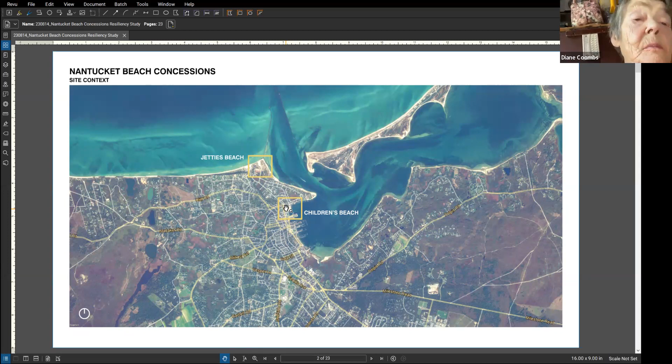Just some quick background, and then we'll go through Children's and Jetties in that order. We've gone through several back and forths in terms of design with the client group, and we've gotten to a point where we're looking for feedback from both of these bodies. So I appreciate your time today. We've also conducted an online survey of the public to understand the public use of Jetties, Children's, and Surfside, and also people's appetite for change on various sites. And so we've also taken that into account. And then we've also looked at the coastal resilience plan, obviously, and how that fits in with these sites.

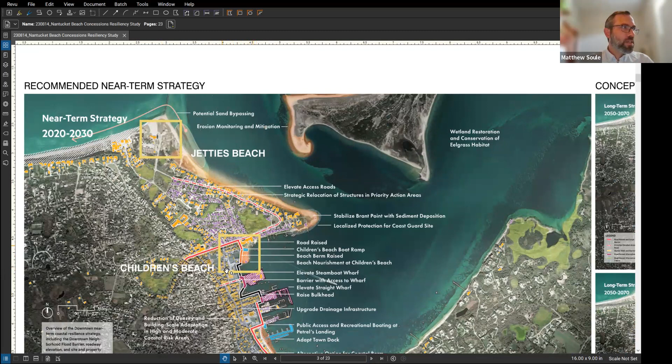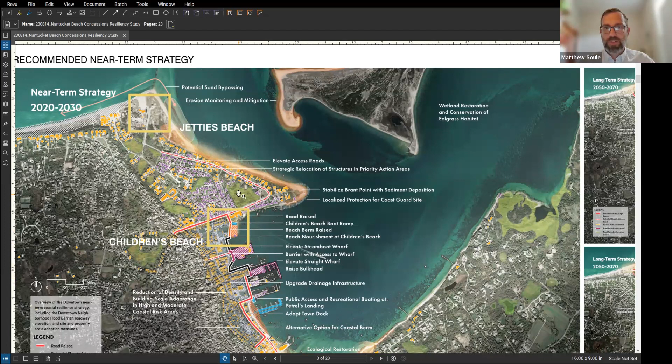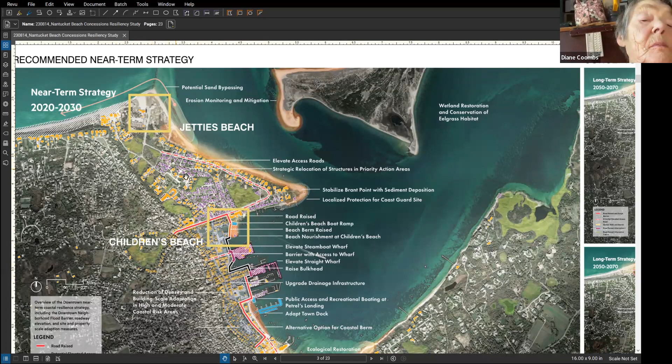So starting with Children's Beach. And also, if something isn't clear, please jump in and ask for clarification at any time. So overall, for the coastal resilience plan context, I'm going to zoom into this corner here. Children's Beach fits within the downtown strategy, and we'll look at that in greater detail with a zoomed in plan. So this isn't the last time you'll see this drawing. And then Jetties sits outside the near-term strategies. And again, we'll look at that in context of the near term and then the conceptual long-term strategies, knowing that these were not actual recommendations of the plan, but were purely concepts that were floated as ideas.

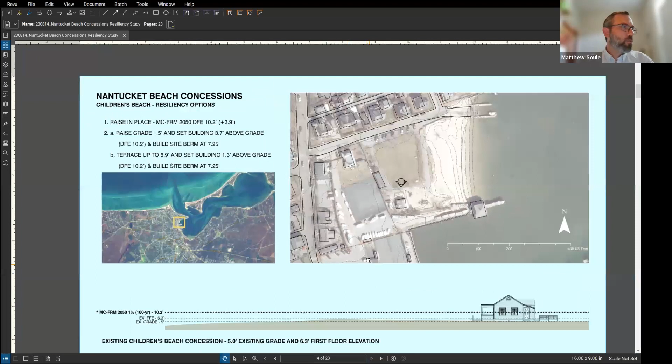So starting with Children's Beach, we looked at 3 options. We looked at just raising the building in place without any site manipulation. We looked at raising grade 1.5 feet and setting the building 3.7 feet above grade. Currently, the building sits 1.3 feet above grade. So that's its current relationship to grade. So obviously 3.7 would be a big departure from that, and we'll look at the elevations and what that means in terms of access and the building facades.

And then we looked at terracing the site up to 8.9, and then allowing the building to maintain its current relationship to grade. And then both 2A and 2B we pushed further than option 1. Early on, it was determined that option 1 was the least desirable of the options. And so we'll look at the site and what we mean by site berm and how that fits into the coastal resilience plan.

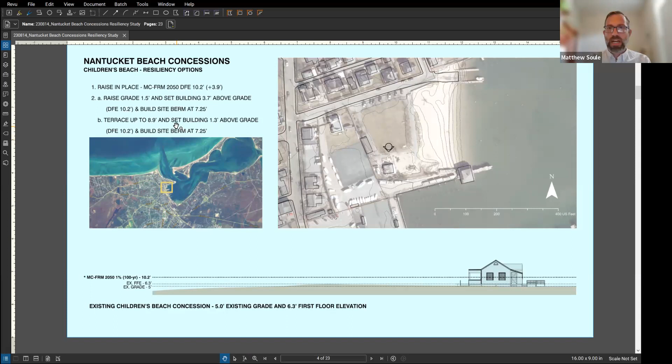And a quick word about our design flood elevations and how we arrived at our numbers. So we are using the MCFRM 2050 1% or 100-year storm with a still water elevation. We have in here what the 2050 100-year storm would be with wave action, which raises it almost 4 feet. And so we landed on the 2050 still water elevation as an achievable goal that did not raise the FFE beyond what is practicable, honestly. And we did go back and forth on this internally with the design, with the client group. So 10.2 is our design flood elevation for this site.

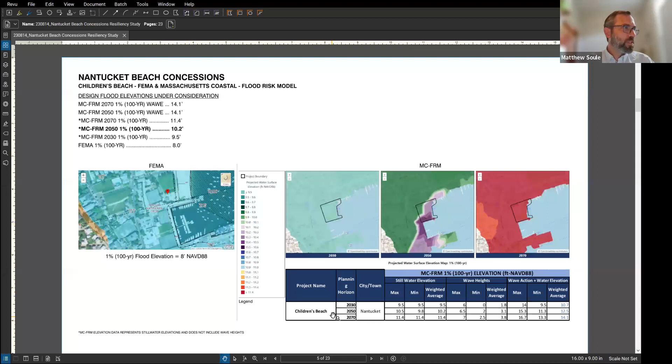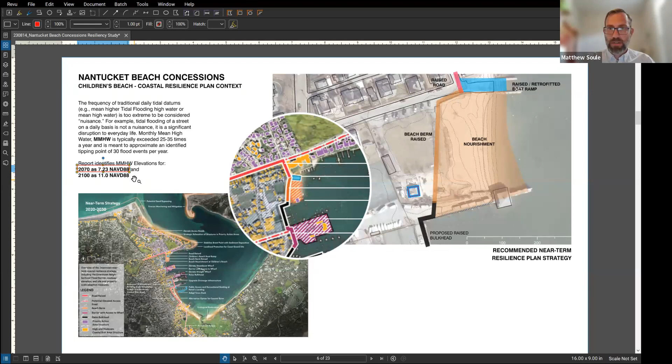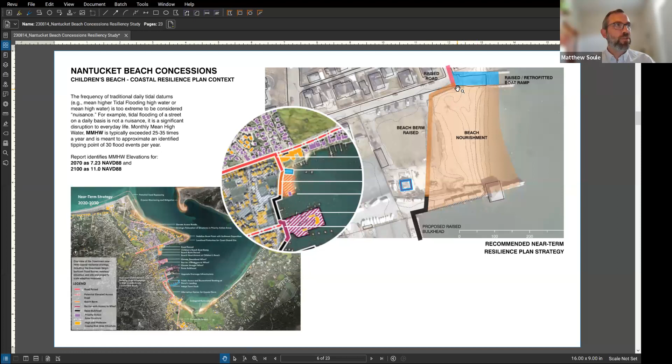We've rounded that up to 7.25. Just, higher is always better. So, oh, excuse me. So in the two options, 2A and 2B, we're aiming for a 7.25 elevation across the site that would be in agreement with the coastal resilience plan. And then we'll also talk about the interface between the raised road and the site and how that could be accomplished.

So this is the building as it exists today with the accessibility ramps. James, do you want to say anything about the building? So the current state of it, it's a vernacular architecture, a colonial style. It has two accessible ramps, as Matt had suggested. Bringing up Holly's point, Vince and Charlie's point, this building is managed by a yearly or bi-yearly contract with a concession system.

And it has elements that if we were to relocate it or lift it up, we'd have to take everything into play. The two existing public restrooms in the rear of the building are not accessible per se. One is locked up, the other one is for storage. So one of the solutions of raising the structure is to come up with external restrooms for future use for the building and for the site.

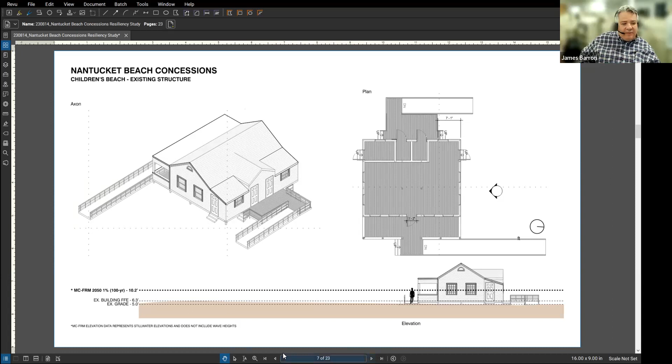Go ahead, Matt, if you want to bring up the next slide. Mhm. Yeah. So go ahead, Matt. Oh, no, I think, James, if you want to tackle this one, because really it's just raising the building without any sort of site improvements.

Exactly. So to raise the building up, we're building a structure, raising the structure up and building a Chinese wall around it to make the building more accessible. Well, it takes away from the curb appeal of the building and the site, because now you have continuous ramps and a platform in the rear of the building for accessible use. Secondly, it isn't inviting to others, because you just have stairs and ramp. The visual impact is taken away because of all this ramp and extension, but for the ramp and extension to exist, the building has to be raised up.

So this option was talked about, but it's not something that we as Weston and Sampson and its parties agree is the best solution. And like I mentioned earlier, we talked about having an external restroom facility in the rear of the building where right now the exterior freezers or coolers are located. It solves the accessibility, but it doesn't solve the vernacular design. At the same time, it's encroaching on individuals using it. So basically, Matt and I went back to the drawing board and came up with another option.

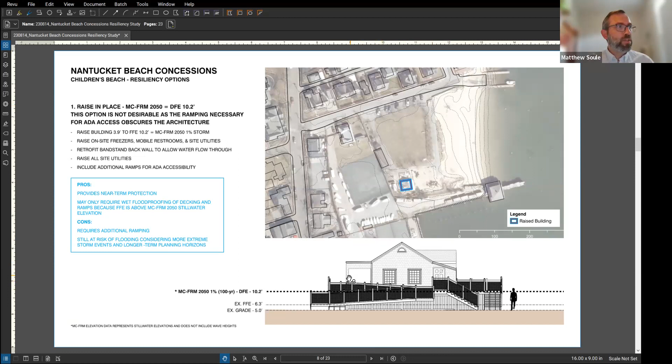And this is, again, just as we were saying, the amount of stairs and ramps needed in this version was really deemed not, that we found there were other options that were better and sort of fit the historical character better. Is that fair to say, James?

Yes, yeah. I mean, the ramp itself is basically based on the Resilient Nantucket Flooding Adaptation and Building Elevation Design Guidelines. But if you really take it one step further, as being an architect, you can come up with a more pleasing to the eye and still have the character of the building exist on the site instead of bearing up with accessible ramps. So it really solved one problem, but caused three other problems to exist.

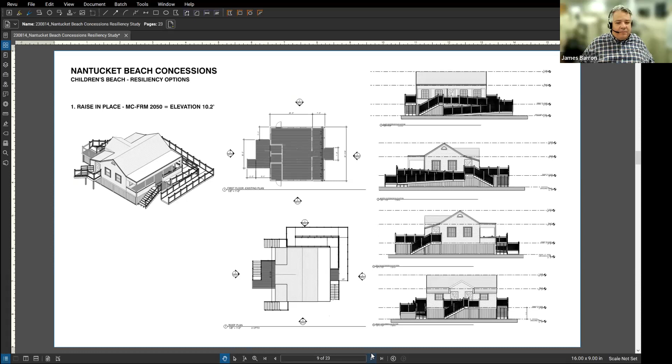So the next version we looked at was raising grade 1.5 feet, and then setting the building at 10.2 for a finished floor elevation. So the building is still 3.7 feet above grade, which is obviously higher than it is now, which changes the character somewhat. And James, I'm going to jump to the plan first, and then we'll go to the plans and elevations of the building.

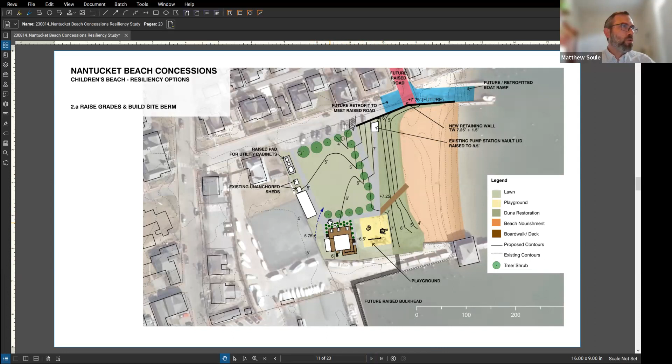So by raising grade at the building, it allows us to slowly ramp up to a berm that would be set at the sort of goal of the coastal resilience plan. That would be 7.25 across the site. As part of this, you would propose to raise the playground. The berm would run in front of the playground. This green area in front of that could potentially all be dune restoration, again, to help mitigate storm surge. And then there would be boardwalk access through the dune restoration to access the beach.

And the existing pump station vault would be raised to be a foot clear of the berm. And then at the building, the ramp access would be along the side to keep the front clear of the ramp. We can zoom into that on the next slide, but essentially the seating area that's currently on grade would be lifted up and put up on a porch. So the seating area for patrons would still exist with shrub plantings around the building.

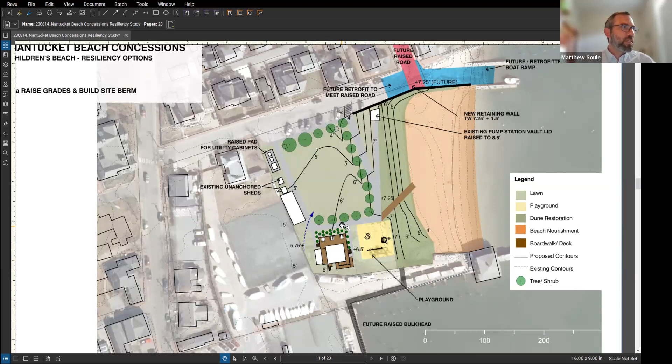And then at the end of the berm, we would propose a wall. The reason for the new wall would be in the future, as part of the coastal resilience plan, this road is proposed to be raised to 7.23 or 7.25. And so this wall would be built to 8.75, which is 18 inches above the future road. So that allows the road to be raised in the future, and also for the boat ramp to be retrofitted against this wall, which would allow the site to remain undisturbed through that work.

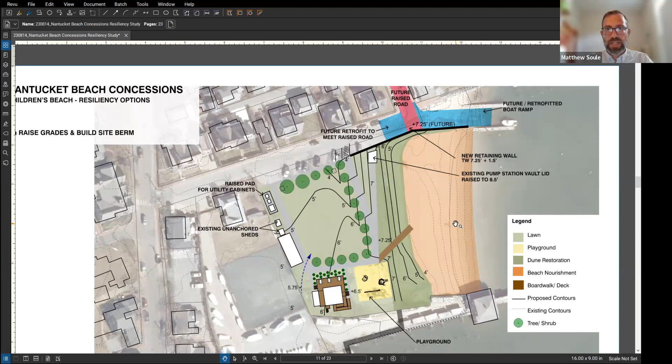So it's a pretty interesting site in terms of trying to figure out, this is where the rubber of the coastal resilience plan meets the road, and how this actually gets executed. And then in terms of the building and the building character, I'll let James speak to how we address that. So on the building itself, in this design, we basically took the accessible ramp and put it at the back of the building, closer to what is the boat storage area. The access to the front or the concession area has the main stairs and the ramp to the left, which wraps around to the new porch. The porch would be facing, as Matt had mentioned, the bandstand area.

Then we now have proposed exterior accessible restrooms, two unisex bathrooms and a mechanical room. That structure would be off to the backside, closer to the tennis courts. So by doing a design like this, individuals approach the building by ramp or by stairs, use the building as a true concession area, and then use the new proposed restrooms to the backside of the building.

Using, once again, the Nantucket Resilience Building Elevation Guidelines and Department of Interior standards, we would not change the character. The only character change would, of course, be lifting up the building and having the wraparound porch and concession area for eating, and at the same time using the character of the site to blend with the facade. Once again, it's not something I'd have on my deck for enjoyment, but we're solving the three problems that have arisen for this site. There's pluses and minuses. A plus is that the central entrance and all the entrances to the deck work with what is originally there.

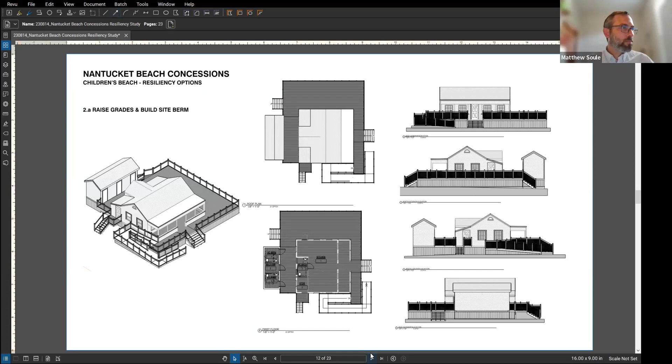And then the last option we looked at is terracing the site up to 8.9, which keeps the building at its present relationship to grade, which is 1.3 feet. We went through a real push and pull here; getting up to 10.2 is a significant elevation change. Obviously if you pull the building up too high without pulling up grade, it just ruins the building character. So we've been trying to find that sweet spot between raising grade and raising the building. I think we prefer this option, and we can talk through why.

So it has a ramp on the face that ramps you up slowly to the access point, and we would maintain the ramp that's there today. We can jump to the plan to see that a little better. And then also there would be plantings around the building to mitigate that grade change. We can look at the grading there. So we're still raising grade a little over a foot to 6.25 from its current elevation of 5 to lessen the amount of ramping you need to do.

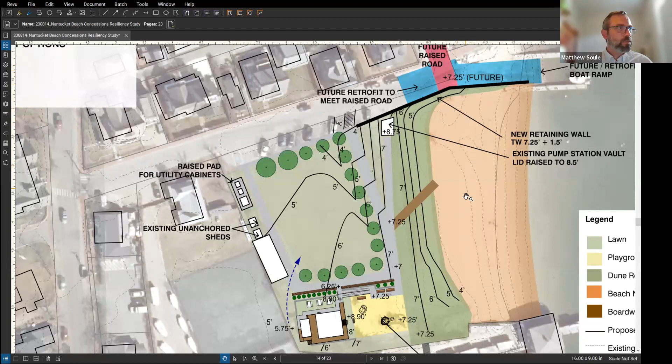Then there's a direct switchback that gets you up onto the picnic terrace at 8.9, and then you have the accessible ramp almost as it is today that gets you to the building FFE. And then it's the same site treatment in terms of the north edge of the site with the future raised road. And again, a dune restoration in front of this, along this new raised edge, and a boardwalk through to the beach.

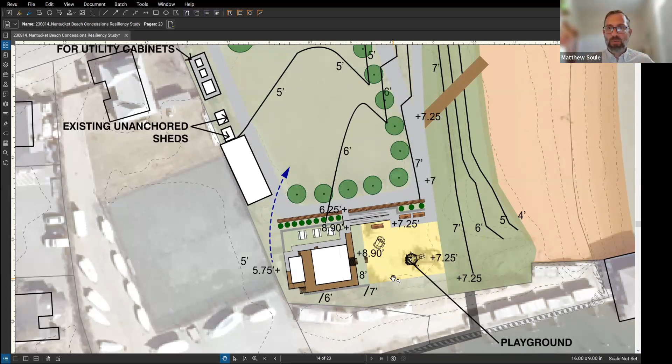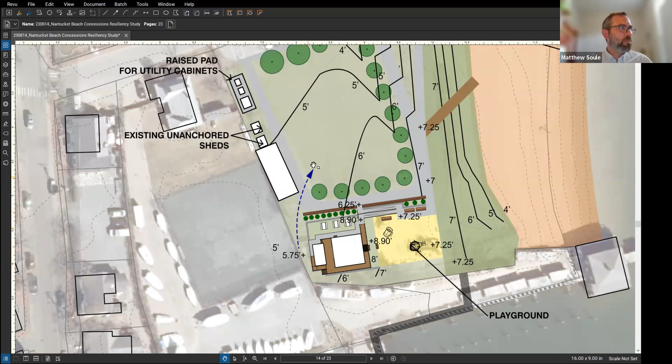And then we were careful with the walls. The walls are perpendicular to the coastline. There's no wall that's parallel to the coastline. Walls that are parallel to the coastline exacerbate wave reflection and scour. So if this is overtopped, the waves are really just going past the walls; we're not introducing a vertical surface. And then we're coming back down to existing grade in the back corner, just enough to still get water out from that back corner at elevation 5.75. And I'll let James speak to the...

In this version, we are not addressing the unanchored sheds that are on site. We would propose a raised pad for the utility cabinets that are on site.

Ray, I see you have your hand up. So I have a load of comments and questions. Is it appropriate to start into it at this point, or would you like to continue? If we could just wrap up this description of this version of the building, then we'll stop and discuss the versions as a whole for Children's before moving on to jetties. Does that sound good? Absolutely. Okay, thank you.

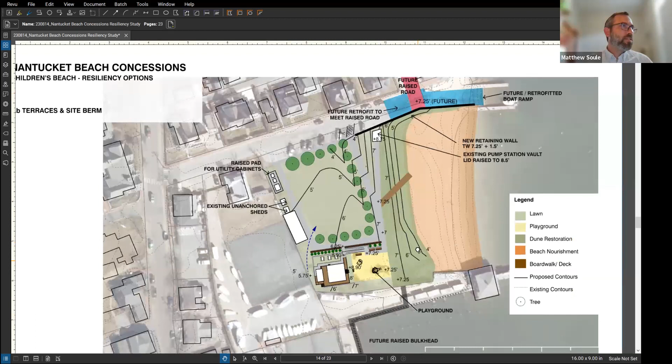And so the bandstand would be retrofitted to have breakaway back walls, but we're not proposing to raise the bandstand at this point. James, I'll let you speak to the building changes. Thank you. So the 2B terrace site berm: we're not really taking a lot of what is existing for the Children's Beach concession area. We're doing the bare minimum, but now it's a grade change instead of a platform and terrace change. It doesn't put a lot of impact on the building per se, and visually it doesn't take away from the site itself. Once again, on the rear of the building, we show accessible bathrooms that are open year round, and the vernacular plays off the building itself.

I think that's the important thing: keeping the consistency of the design for the addition and for the original building, and visually it works with the site too, developing it this way instead of having these additional ramps that bring the building up, so set in place, which really all three options talk about, set in place. I think we embraced the comments from the early level of the community. And I think Matt and I have come up with a pretty good solution, but we're open to suggestions, of course, so.

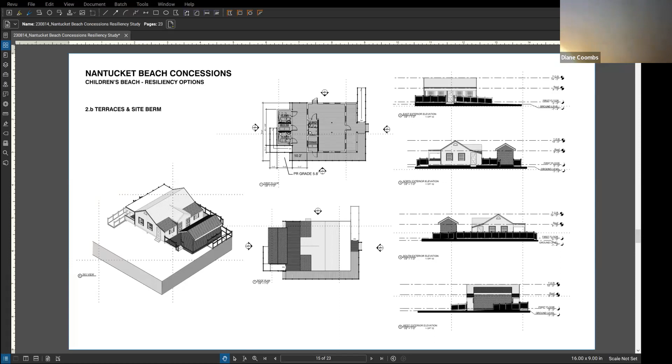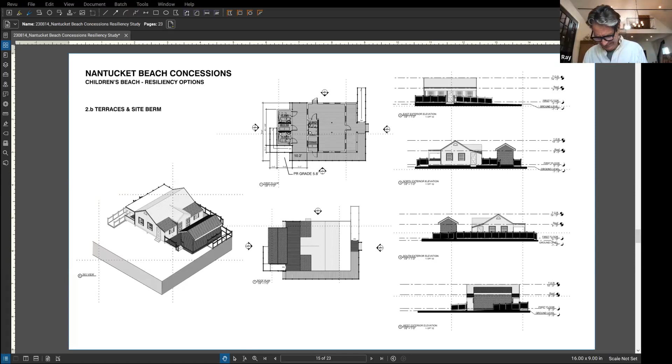Thanks, Mr. Chair. There you go. Sorry, I got a couple things going on. Yeah, so we see. Stephen, are you there? Oh boy, we may be having technical difficulties. Sorry, Mr. Chair, I'm back. There you are.

Yeah, so I guess I'll just be quick. Where I'm at with this is, I don't want to get into architectural comments. I believe this is going to require further notifications, so I don't want to get into any of that discussion, other than to say I agree with the chair's comments, I agree with Diane's comments. I am concerned about the ADA being around the back. I'd like to get an understanding of how this fits into the town's vision, the ConCom's vision, and the Coastal Resiliency group's vision with respect to how this particular approach, which is along the lines of hardening, not retreating but raising, fits into the bigger picture.

And under the common ground approach, no pun intended, sitting here with ConCom, I'd like to get some understanding of what they think about raising the grade, because my understanding was that was kind of a no-no, and we've always steered away from that. It'd be a very important tool, but I don't think it'd be wise to be doing it piecemeal, in this instance and in others around Brant Point and other areas. So I'd like to understand their thoughts, one, on the strategy, and two, on a comprehensive approach. Perhaps an area plan would be appropriate.

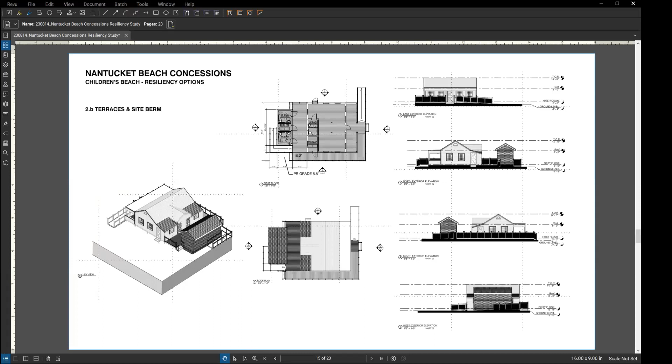Thank you, Mr. Chair. Thanks so much, Stephen. Okay, Joe, Carrie, Connie. I don't have a hand raising thing, or I can't find it. Well, you don't need it. I'm recognizing you. Thank you.

Along the lines of what you said, Ray, I would most want to preserve the building as visually impactful as it is today. I am not against raising the grade, but knowing that ConCom might be, I think we really need to pay attention to what they have to say. But if they would consider it in this case, I feel like we should split the difference, maybe ramp some grade and ramp some building. Already there is a ramp that wraps from the main entry around the back, I believe, and I wonder if we can still ramp from the main entry and then around the back, in a way that you could get up half the distance, splitting the difference between grade and building being raised. But again, what you had said, which is really important, is maybe cross bucks or something, so you don't have that more than 30-inch drop, so you can have light visibility through any new decking and railing and all that. I also have more questions about raising the grade of the park and how to get down to the beach and the dune that's there and the wall that's already there. So I'd have more questions about the overall site. That's all I've got now.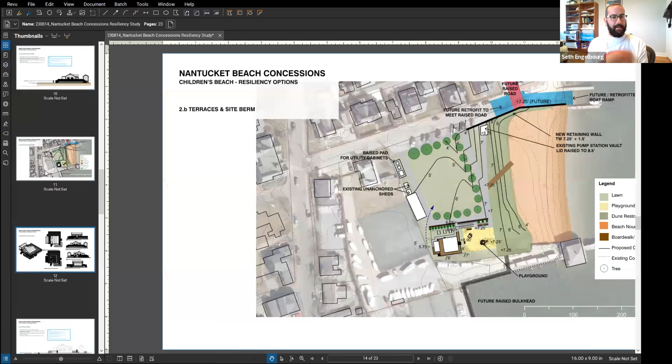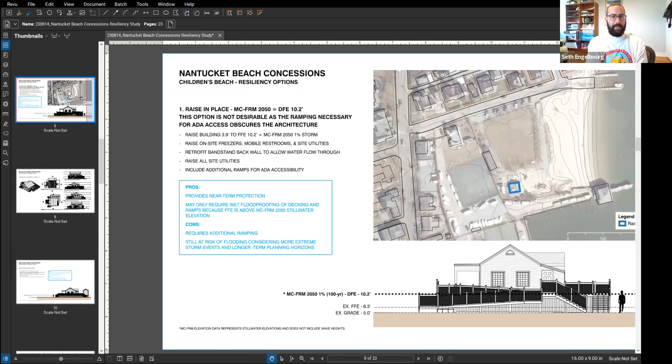Well, actually, I think you're going to have to seek a waiver for any project presented at this point, because even in project design number 1, even though the current building on site predates the enactment of the Wetlands Protection Act and the Nantucket local bylaw, so it could be considered a pre-existing use, extending or modifying that use, which is what this would be, is a significant extension or modification, and would forfeit that pre-existing use. It would then require you to meet the performance standards, which I doubt this would meet. So you're looking at a waiver probably for any of these projects.

I don't think in my history on the Conservation Commission there's ever been a project in this area that's allowed fill to be used on site. Specifically, I just looked it up—this is flood zone AE at elevation 8. So we're dealing with that.

The other thing is some of the other proposed site improvements, I think, are going to be difficult to get by some of the wetland regulations. Even something like a raised berm, depending on the structure, design, or materials, could be considered a coastal engineering structure. And the proposed extended and raised bulkhead is also going to be considered a structure.

I think right now, based on where the concession sits on site, it's in the flood zone and in the buffer zones to the coastal beach and coastal bank, including the bulkhead, but it might technically be outside the 50-foot buffer to both those zones—I'd have to check. So the structure might be able to exist in that site. We tend not to allow structures within 50 feet of those resource areas, so if you were to move the structure anywhere, you would probably be making it harder.

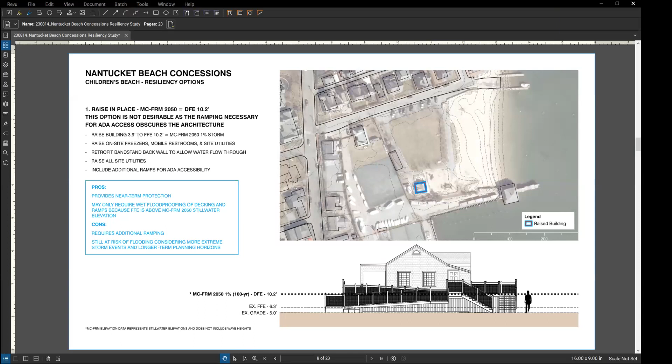I am not a fan of terracing grade. There's a very short run between that bandstand and this structure, and this structure and the beach, and this structure and the playground and the big field that every kid on Nantucket runs around in. I think that berming that thing, taking the bulkhead out—it looks like you're taking the bulkhead out, which has been there for umpteen years—and then terracing it down to the beach...

I don't see how that's going to be effective. From a practical point of view, having worked on a structure right around the corner, the wave action and the push in from nor'easters and other issues is going to push in and take all that out. Practically speaking, I used to be married to a boatyard mechanic, and we were down there pulling boats out, snapping them up. That one storm came up right up to the concession building, and it would wash out all the terracing there.

If we're talking about long term, you know, from a practical point of view, I've been down there too often in a storm. And that storm gate over there is useless. It just drives the water to a different location, which will be this.

So I'm having more trouble with the changing of grades, the berming, the taking the bulkhead out, the singular access down the berming on this particular plan, and the other one-by-one boardwalk. I don't know if you're going to be able to reach 1 in 20, or 1 in 12, whichever one you're doing for AAB and ADA.

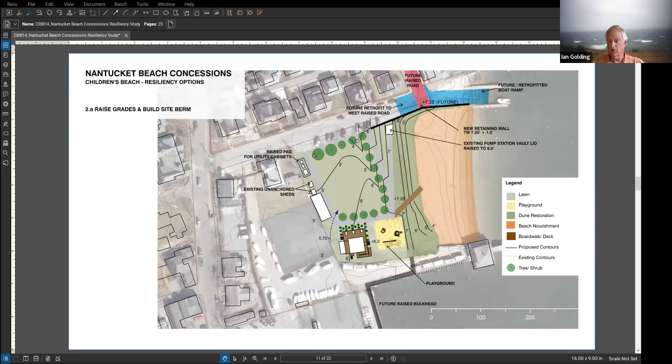I don't know if you've had computer modeling of how the berm might act in a nor'easter. I'm not trying to make your job any harder, but all of us who've lived here for a while have witnessed what nor'easters do. But speaking as a private individual, I absolutely prefer the approach of raising it without making it look as though it's a fortress. So I think 2B, if it was in concert with an approach for all of downtown, would be a laudable approach. Thank you.

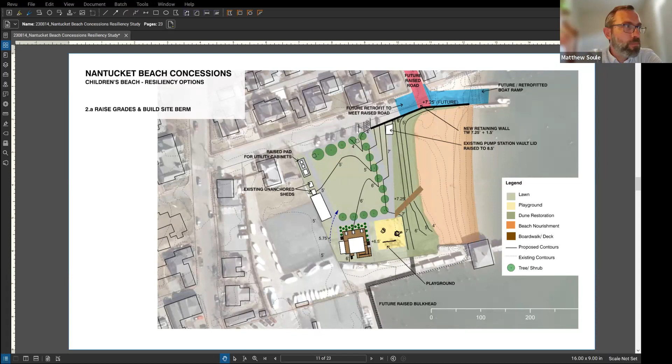Thank you. You've all raised a lot of good questions that we've been grappling with. And this is why we wanted to have these two groups comment together. It really is, as you've noted, a rock and a hard place in terms of treating a historic structure, where if we

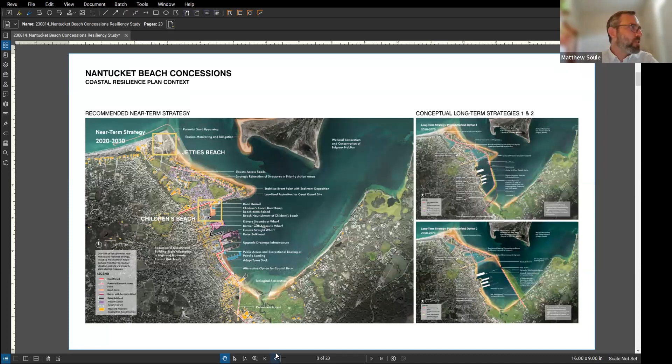going back to option 1 here, apologies for jumping around. So the existing structure and then raising in place. Raising in place is ideal from the point of view of not changing grade, not adding any fill, not having to negotiate, or perhaps that's not negotiable, the idea of raising grade here. And then we're left with a building that once you raise it has really lost its historical character. And so this is the struggle we've been going back and forth with.

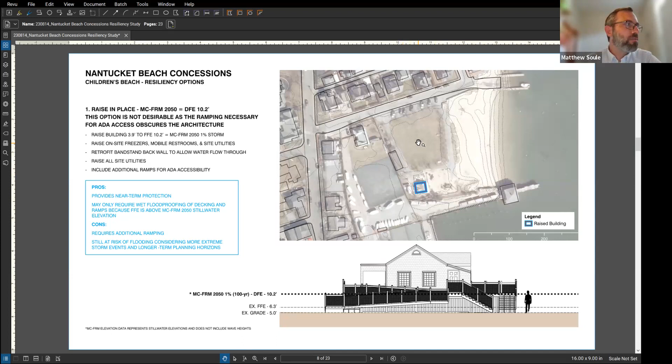I think you raised a good point about needing a unified approach to protecting the downtown, because this site does need to be raised in some way, if you're talking about the long term, eventually. This is the elevation 5 contour here. It's closed here, and then this is elevation 6, and that's really your high point, and then you're dropping back down to the beach.

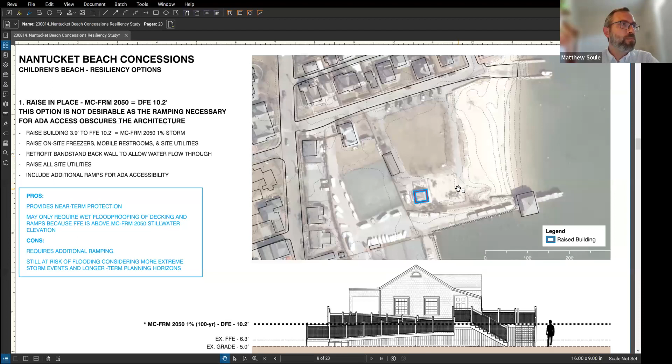So raising it is really 18 inches of fill. Not to say that that's allowable. I'm just saying the actual change in grade is not that significant. But trying to figure out what is permittable in order to get to that 7.25 elevation to potentially close off that downtown flood pathway is sort of what we were struggling with.

I think I don't have any, you know, everybody has raised a lot of good points, and I think we needed to hear it all together. I don't really want to go through point by point at this point. I think we need to regroup as a design, with the client group, and sort of figure out next steps having taken all of your feedback.

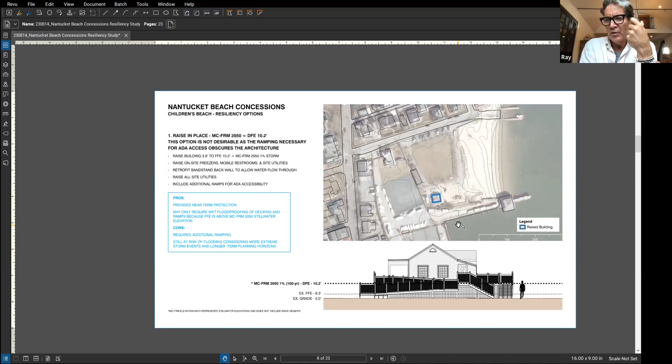Ray, thank you for being patient. Yeah, go ahead. I did want to get back to one thing that I said. The fact that this building is considered historical, and the fact that we, as a board, the HDC, can write you a letter that allows you not to completely conform to the code. I'm going to guess that the reason we're all gathered here to review this is that you want to get it completely out of the floodplain. That's the goal, right? Yeah.

So existing is 6.3. If we got an exemption and we left it in place, and in 2050 we had a storm that was at 10.2, it would destroy the building. Once you have over 2 feet of water within a structure, even if it's wet flood proofed, it becomes structurally compromised. So we were hoping to get it up above the water. Well, okay. I don't want to get too granular, but right at the moment, how high is the finished floor above grade? It is 1.3 feet above grade currently.

Okay, so let's just go down this path for a moment. Sure. If we grant you the exception and you don't have to bring it up to code, it sounds to me like you could bring it up at least a foot. Then you're still less than 30 inches for your drop off. So you don't need the big balustered rail that I think everyone, certainly from my board, is having a knee-jerk reaction to. And so you still maintain the cottagey feel. You have it a foot higher than it is now.

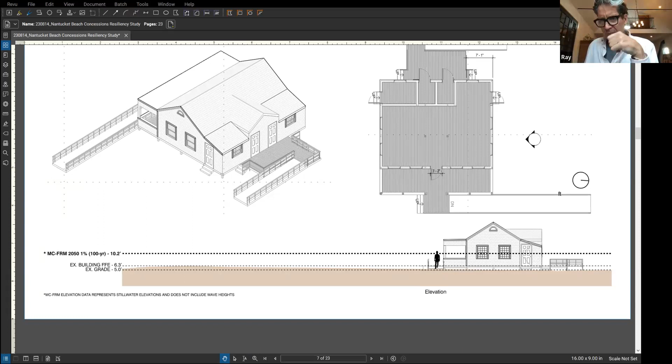I think this is a conversation you might want to have with Holly, who's very well versed in what your options are, other than simply bringing it up to meet all the current codes. Holly, do you want to? I see you have your hand up.

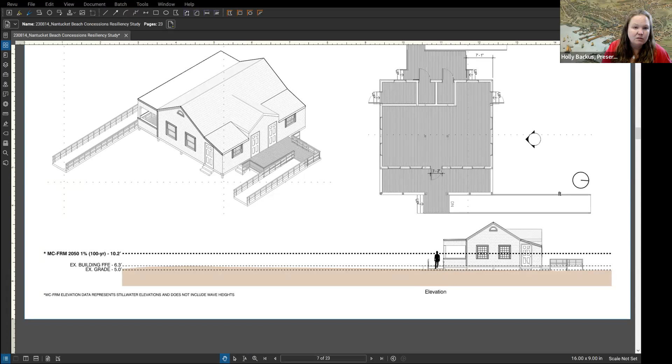Thank you. I just wanted to mention that I think it's important with all 3 of these options that all of them are actually being raised less than what is asked for. For instance, and please correct me if I'm wrong, the first one for raising in place was an increase of 3.9 foot elevation. And then 2A was a 4 foot raise in elevation. And the 4 foot, I'll remind the HDC, based on our Resilient Nantucket, is at the low end of the recommended elevation increase.

So they were looking at this, and James, correct me if I'm wrong, based on our Resilient Nantucket and based on the fact that they can have that exemption because these are contributing structures to the historic district. Correct. So that was all taken into consideration. Really, what it boils down to is these locations being in low-lying areas, within areas that already have future plans with the coastal resiliency plan to be elevated.

And how is it done? I hear everybody loud and clear about this piecemeal effect. I don't want to speak for my fellow town staff members, but I think we all agree that we don't want this to be piecemeal, but how is it done? And the town should be leading by example. So I agree with Matt and appreciate everybody's comments today on this. Thank you.

Vince, did you have any thoughts or questions before we, oh, sorry, Linda, I see you have your hand up. Linda, please go ahead. I still want an answer to that question about exempting commercial structures, tight wrapping them so they don't have to come up that far, et cetera. I've done it at least 3 or 4 times downtown. And I'm working on a building now where we may or may not have to do that because it's a contributing structure. So I want an answer to that.

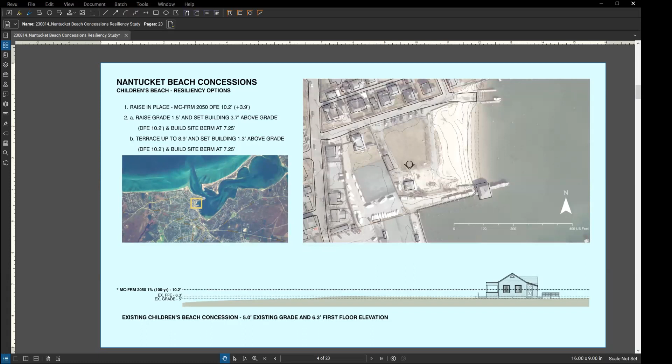I don't have the answer to that. Yeah, Linda, I need to look into that question. So, yeah, because we have a building downtown and we have the barbecue down there on Straight Wharf. The first 4 feet is concrete, but it doesn't look like it's raised. There is one on South Water Street where, because it's a commercial structure, they tight wrapped it. There's one going down, it's now in the velocity zone, it wasn't at the time, down Washington Street where they tight wrapped it. They didn't have to come all the way up. So I know there's something for a commercial structure where it doesn't have to come all the way up out of the flood zone. So it might help with this whole project.

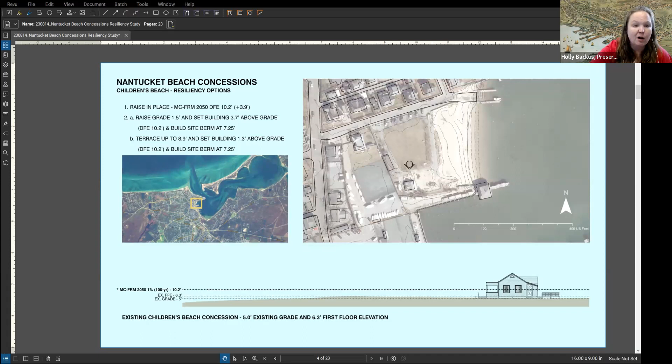Thank you, Linda. Sorry. So can we ask a member of staff or Holly, could you address this and reach out to us through staff so that Linda gets a reply to that? Thank you very much. Work on that. Yes. Sorry, Matt, just a follow-up on that. I believe with our Resilient Nantucket, it doesn't matter if it's commercial or residential. It's a matter of whether it's contributing or not, and it doesn't have to meet the substantial compliance under the building code. End of story. But I'll look into this commercial aspect. Thanks. Thank you, Holly. And Matt, I apologize for interrupting you. Oh, that's okay. Thank you.

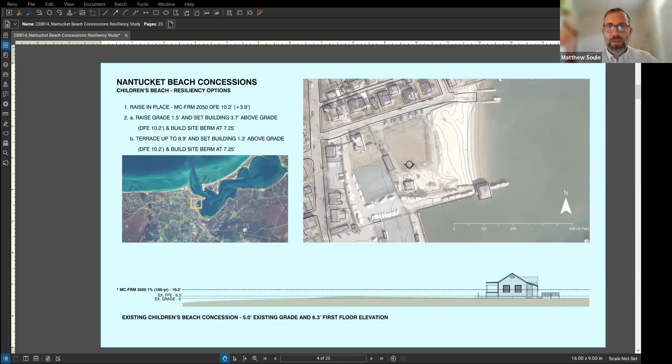Vince, do you have any comments or questions before we move on to jetties? No, at the moment, I think we're getting the feedback we need and that is relevant for the project. But it is probably time to move on to jetties at this point. We're going to have similar discussions there, I should imagine. So once they're taken as a whole, we can get a better sense of how to address the project and how I'm trying to reinvigorate these designs. Thank you, guys. Yep, understood. Thank you, Vince. All right, so we'll move on to jetties.

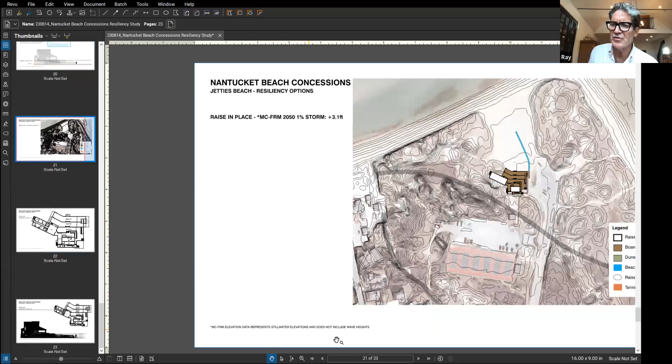Jump forward here. Matthew? Yes. I'm going to need to jump off. And I think that when I jump off, I believe Stephen can fill the chair for the HCC. I think he's still on. Yep. Okay. Understood. Thanks. Thank you. I think it was a productive meeting, or at least the portion that I'm seeing. Thanks so much, everyone. Yeah, appreciate it. Yeah.

So for jetties, this is really much more of an architectural solution. And we'll walk through the options there. Again, we landed on the 2050 1% storm, which is elevation 10.3, not to be confused with the other site, which was 10.2. And again, this is a still water elevation. And again, this was really chosen for feasibility and our ability to raise the building without really seriously impacting its character. Currently the finished floor is at 7.2, which is 3.1 feet below the 2050 target design flood elevation. Ground elevation is 3.3.

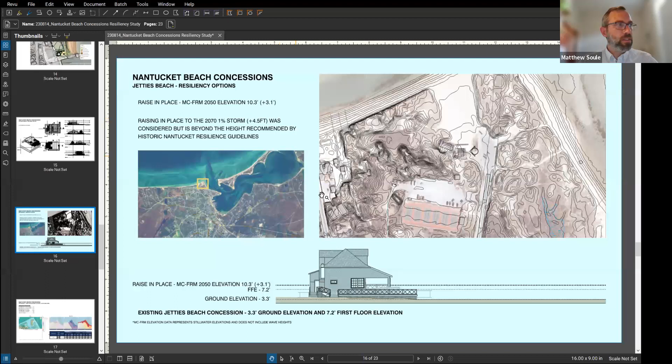We did look at moving the building back, potentially siting it within this parking lot back here. But that was both poorly received in the public survey, and the building's relationship to the beach obviously changes drastically when you do that. So even though it's elevation 5 back here, it's a vastly different feel. We also did look at raising it to the 2070 storm, but that is 4.5 feet, which is beyond the Historic Nantucket guidelines, and also really does a number on the appearance of the building.

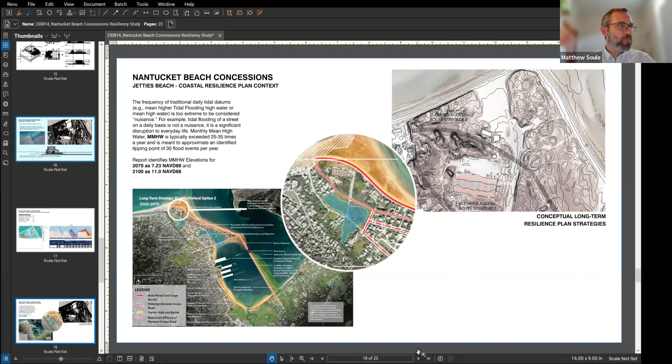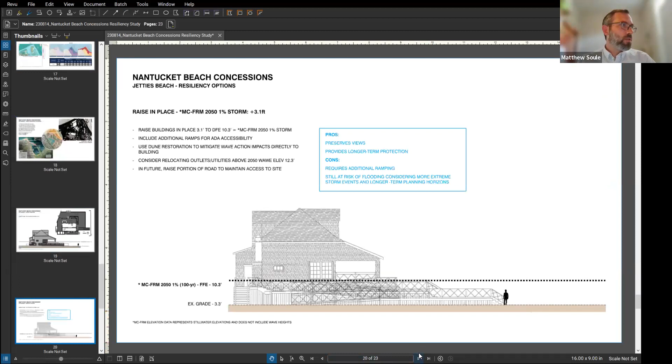This is just showing the conceptual long-term strategies. Again, these are conceptual, so we don't need to dwell on them. Whether there's a raised road that protects this part of the island, either way, the building is seaward of that raised road in its current conceptual idea anyways. So essentially I will jump ahead just for the ConCom members, just to show that really in this project, we're leaving the site really as is. We can't raise the road without significant engineering challenges that involve pumping the stormwater. If we raise the road, we're also affecting the dunes on either side. So the road question needs much further study.

And the beach in front of the building is really well used. We did look at raising the building and then separately closing this off with a dune, but that really does impact the social use of the beach, and along with potential impacts to bird habitat, that also didn't fly.

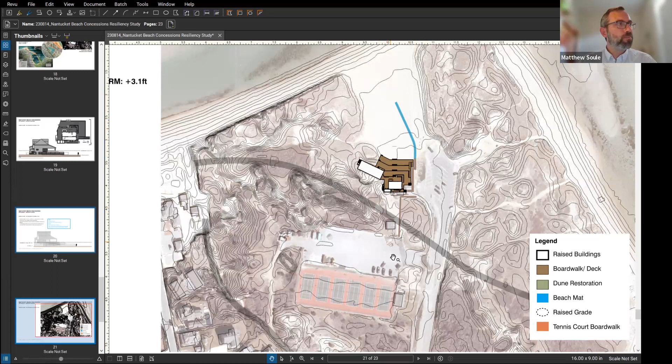So I will turn it back to James to discuss the building approach to getting up to 10.3. Yes, so back to talking about raising a building and lowering a building. The situation with the Jetties concession or beach concession facility is it's a larger facility, as we know, 2 separate buildings. And back to Matt's decision, a previous idea was to move it back from its existing site location. We're basically taking away the historical context.

So to look at this building and solving the scenario of how to raise in place and not have an impact to the building facility, we started looking at the original building and its terraces. Right now the building's layout is the main building and then one terrace or one ramp/terrace below. So taking upon that design and looking at the impact of going from 3.3 to 10.3, which is a 7-foot difference, and looking at the historical context of the building as a Peabody and Stearns original structure, 1904, we look at the terraces themselves and the usage.

So Matt, go ahead with the next slide. In this case, we look at what I would call a wedding cake design. So it's a step design. You take the building itself, you take the terraces step down away from the building, going towards the shoreline. At the same time, you take the accessible component and integrate it into the terraces themselves. So instead of one continuous ramp, you break up the ramp, you break up the steps and the stairs going from terrace to terrace to terrace, so that it becomes more of a functioning space to which it's being used right now. Circulation wise, the accessible point is closer to the parking area as exists right now.

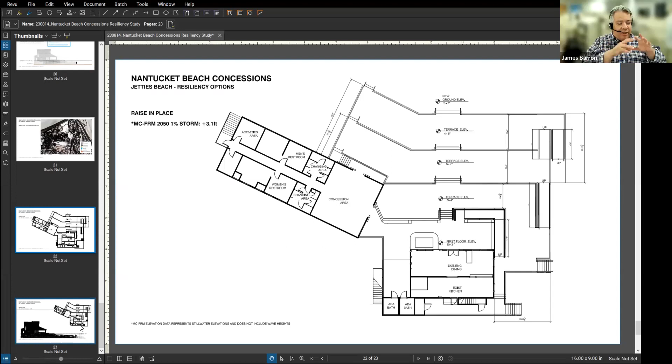And visually, by doing this step process, as Ray had mentioned about the balusters, we use the original Chippendale design between the posts, so you can see right through it. It's a breakaway system, as Linda had pointed out, in this building. So the main building would be raised exactly 3.1 feet, but it has the breakaway portion so that water would just flow right through it.

I'm trying to think what else is another point of it. We have not changed the main building character. We just basically start changing the terrace character. The terraces themselves were built at a later date. We're just adding to them, so it's more of a functional space. I'm trying to think what else. And then the flow of the building. We have not really changed the flow of the building. It still continues from the back side of the building to the front side of the building, and everything works in its favor.

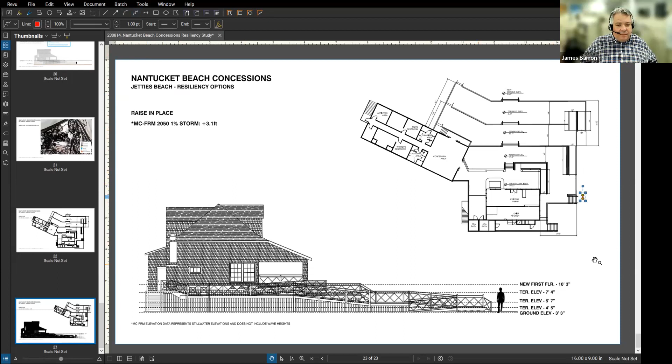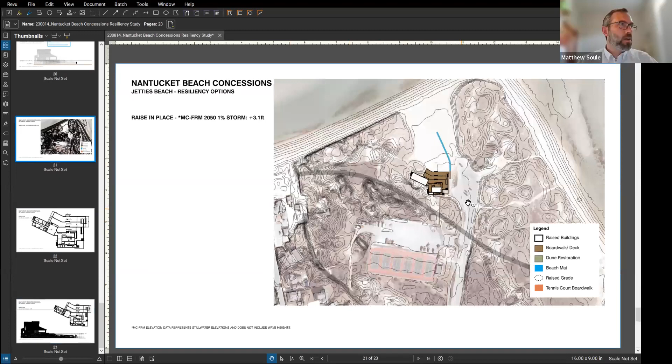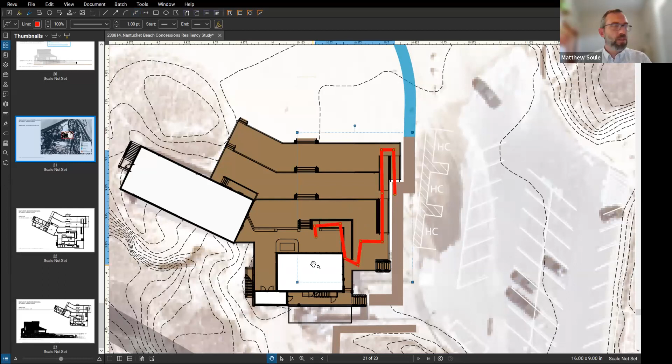So it's up to you, Matt. Yeah. So in terms of the relationship to the site, there's a boardwalk that allows an accessible surface at grade coming off of the parking. And then to James's point about circulation, you'd enter the first terrace here, you'd either continue on or come all the way up to the current terrace level right before the building, and then be able to circulate through. Site-wise, there's not much else to say. So I think at this point, we'll open it up to questions. Yep. I'll go back to the

Linda. I'm really concerned about this. That area that you're extending out there, how many feet is that from the current lower deck that it's going out? Mm-hmm. Oh, about, boy, like 30 feet. 30 feet farther out?

That area is used as beach. They sit on the beach there. They have activities on the beach there. They have picnic tables down on that beach so they can be removed if there's a big activity like a volleyball tournament that goes down there, which I've run for 35 years.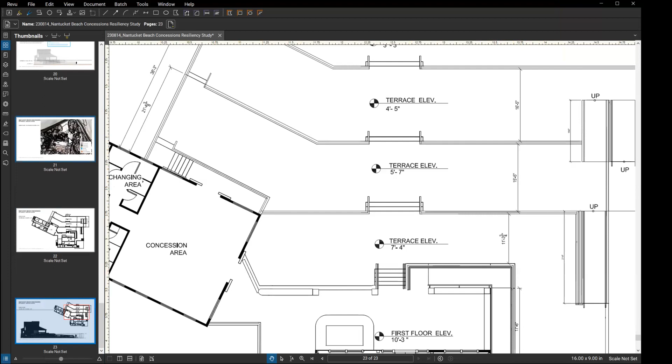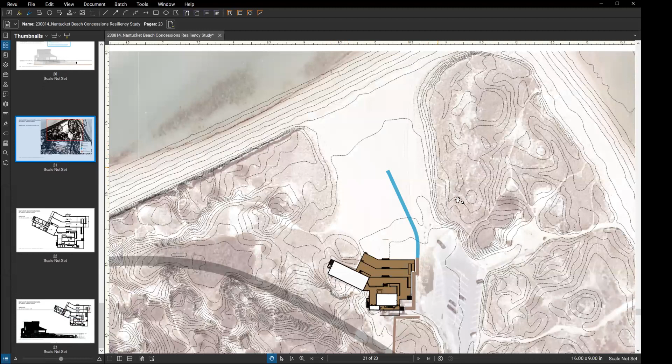And I'm looking at this going, wait a minute, that's taking a beach, and the beach is getting narrower and narrower every year because the dunes are actually revegetating themselves. So the east to west of that beach is actually getting narrower. You can see one of the old volleyball posts about 25 feet to the right, where the beach used to be that wide.

And they rope it off because of the plovers, and that doesn't help. But every year the beach is getting narrower and narrower. And your terrace on the left or the west side is going right up against a dune that's closing in the way we want the dunes to revegetate, but it's eventually going to take over the whole Jetties Beach.

I'm concerned about this particular iteration where you're extending out another 30 feet of structure. Just from a practical point of view, a beach usage point of view, and over the sand, another 30 feet. So I'm having a lot of difficulty with this particular iteration. I don't know if there's another way around it. Again, as you know, if you lift it a little bit, the water can go underneath it.

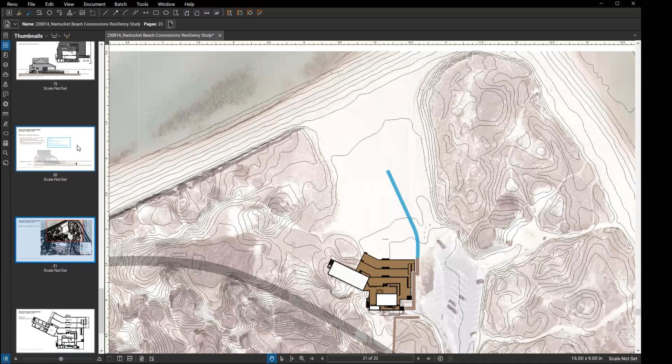It does get up. I have seen it come all the way up and go into the parking lot from the northeast, and down the street. In the no-name storm, the front porch came off and it floated all the way down Bathing Beach Road to the corner of Hulbert Avenue. So I know what can happen here in a bad storm. We get a 100-year storm every year now. And I'm not enthusiastic about extending the structure out that far.

I'm sorry. I know we need to fix the building. I know we need to protect the building. It is a historic structure. Unfortunately, a lot of the more historic aspects of the building have been taken off over time since the turn of the century, but I'm having trouble with this particular iteration.

Thank you, Linda. And since it looks as though ConCom is going first on this one, Seth, would you speak? Thank you, Mr. Chair. I share some of Linda's concerns. First I'd like to start by saying I agree with the decision not to move the structure because there's not really any place to move it to.

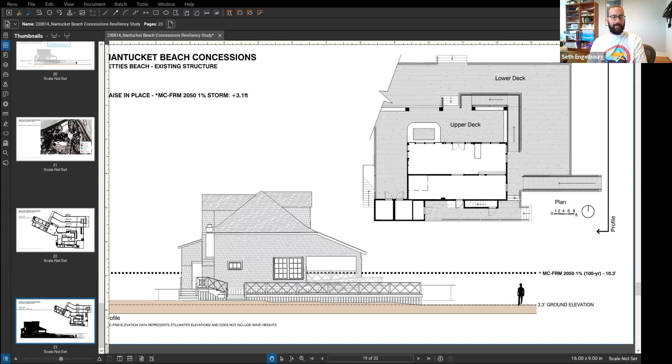The historic character aside, if you look at the rest of that site of town land, you're either moving it from one flood zone to another flood zone, or the only place that you can move it outside of the flood zone on this site is a mapped coastal dune. So you can't really get it outside of a resource area here. So if you can't, might as well leave it where it is.

But where it is, it's both within the flood zone, AE at elevation 8, and it's actually completely within the coastal beach, coastal dune interface. So now you're not talking about a buffer zone project, but a structure that actually exists in a resource area. And in our performance standards for coastal beach, there is a requirement that no new structure should be allowed within coastal beach. These extensive terraces would definitely be considered a structure.

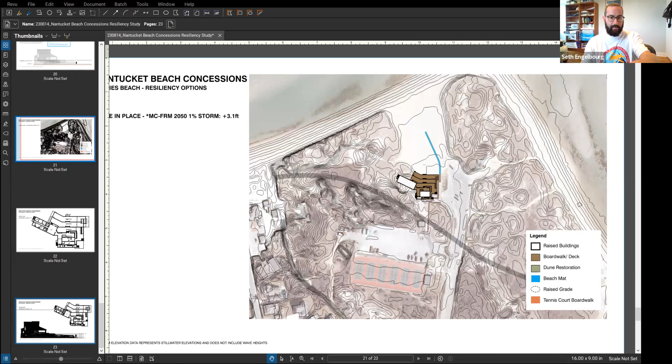I get the need to create ADA access. And again, there's going to have to be a waiver project here. But something as massive as what you're picturing here, not only 30 feet long, but however wide that is, I don't know, 50 feet wide, it's a huge amount of surface area and of structural area.

So from a private citizen's perspective, I think I understand it. I think it makes sense theoretically, but I see a huge problem from a regulatory perspective here, that something like this is going to be very difficult to get put through, and would need to be waived.

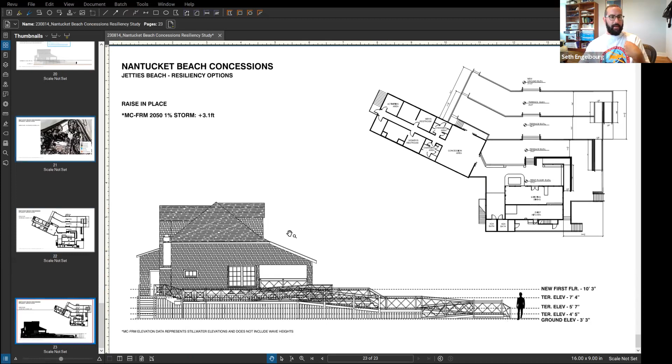One thing I was considering is, if you look at where the buildings are currently, they face towards Nantucket Sound, and facing towards the parking lot are the backs of the buildings. The backs of the buildings, to be honest, are still flood zone and still coastal beach, but there's perhaps less of an impact if all this terracing goes in the back rather than in the front, because at least it's farther away from stormwater passage.

I will say though, and Vince and Jeff can back me up on this, the building that's all the way down by the tennis court used to be the Natural Resources Department office, and they spent every day there.

And in big storms, water goes all the way past there and floods that building out. So this is a very constrained site. And I think it's going to have to be waivered through the Concom, or I don't know if it's technically called a waiver or a variance through the HDC, but it's going to be a difficult project to get through. And I think less is more with all these projects. Try to do the absolute least amount of disturbance possible, and use all the tools available to you. It might not be the ideal project that you're hoping for.

But again, I just think that if we're doing these things incrementally, we should use incremental approaches. And then when we go do a substantial project for all of downtown, then we can do the bigger picture projects. But I wouldn't be able to support this as a single site project as it's presented today. Thank you.

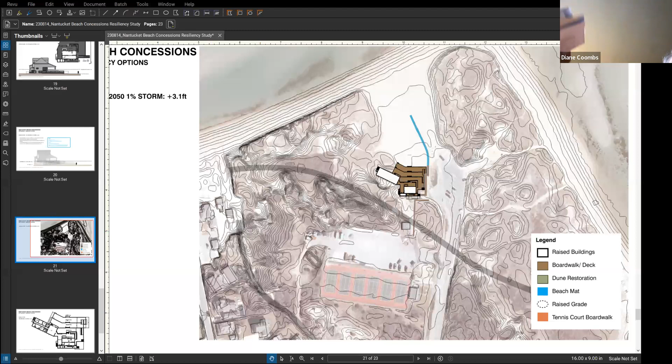I was wondering why this building is considered to be increasing by the amount of area that it is. Why can it not stay the size as it is now? Why are we adding 30 feet out and however many feet wide, which I can't pick up?

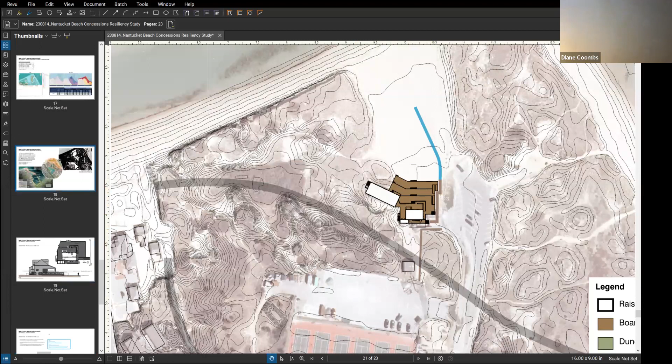Why can't we consider it as it exists, which makes it more adaptable to what we have there? You've got a huge dune just behind it that is a considerable size, and actually the whole area behind that building is that extent. Why can't the area in front of the existing building be kept as sand? If they have something special to add for that, but not go to the extent of what is proposed to be added to it now. That's my question at the moment. Thank you.

Ian, I guess I'm asking you. Oh, well, I think really, again, to Mr. Soule, the question is this is preliminary, where they're listening to what we have to say and taking our suggestions into account. I think we're all wrestling with these issues. So I don't know whether Mr. Soule or Mr. Barron wants to address that in any way, or if we just want to take this under advisement. I don't know whether staff has anything further to say.

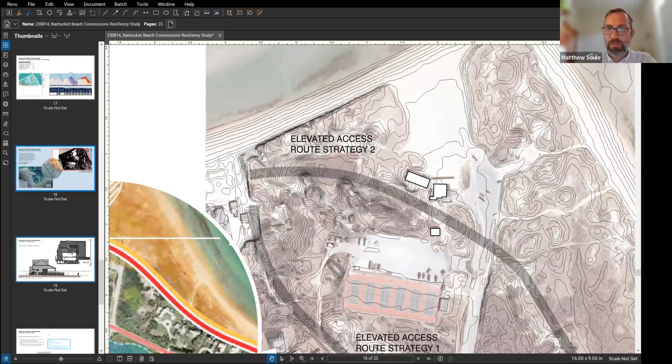I guess I would just say to the question that it was in order to reach the target elevation, the additional terraces were added to break down that height difference, to essentially terrace the building back down to grade. And that's really driven by the amount that we're trying to raise the building.

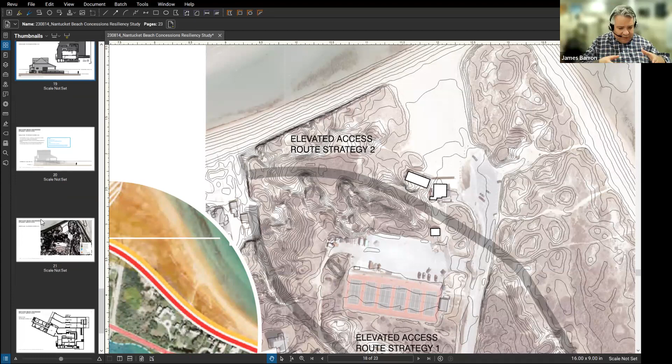James, is that fair to say? Yeah, that's fair to say. So instead of having, going back to where we lifted the building up and visually it was just like a wall, now we're stepping the building down. So it gradually goes, raising the building, but stepping the terraces up to it, so it visually doesn't impact as much.

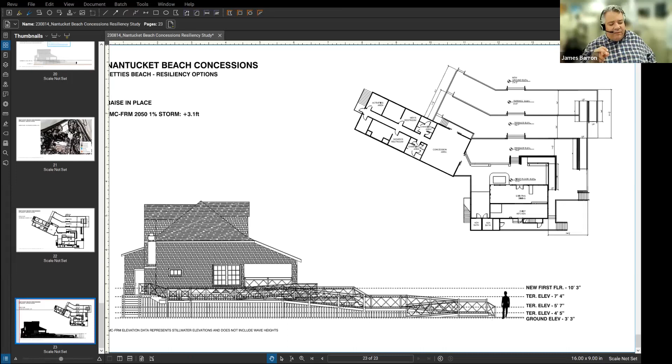But I understand the concern of now you're building these terraces out and taking away the beach and the concession and the beach operation itself. So does it go back to the drawing board? Yeah, it does, in a way, that we try to solve two things. We try to solve accessibility and raising the structure for the beach. Now we have to look at, okay, if we move the ramp and relocate these terraces or take the terraces out, do we still hold the circulation, but still, the question raised is, do we still raise the building?

Do you mind if I add something to that? Just as a fellow HDC member, to Diane's comment too. As an architect, I can appreciate your solution here of the terraces because it is in keeping with the terraces that are obviously more extensive, but I can see where you got to that wedding cake design as you described it.

I do think it's clever that the ramp works off to the side. If I think about this as a business owner running the concession stand where their dining has expanded out onto the beach area with tables and more seating, you'd actually consolidate a lot of this dining onto these terraces. If you did an aerial shot in August of this restaurant, you've got the terraces, then tables, then seating stretching out to a marked off area. I don't think you're beyond that area, so from an architectural perspective, setting aside Conservation Commission for a second, I think it makes some sense. It's extensive, but it makes sense.

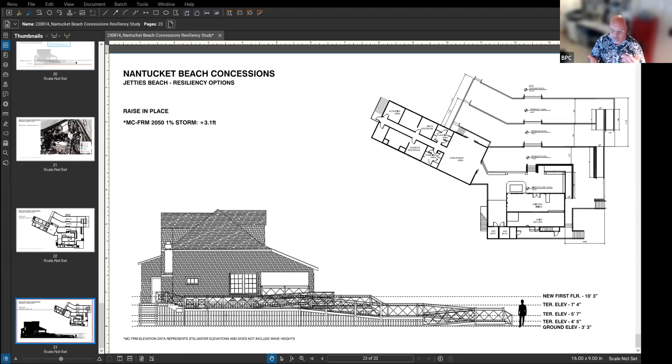One of your first comments about moving this back to the parking lot, I thought that's interesting, maybe not that far back. So when I look at this, I'm wondering whether there's a solution where you do have to lift the building up in order to do all this work. If it were to lift up and go counterclockwise and be more focused on that view, are you able to get more elevation naturally, which maybe diminishes one of these terraces? Setting aside what Seth said about there being a berm or jurisdiction along the back of this thing, all of that might be irrelevant. But from an architectural perspective, I can see where this thing going clockwise and counterclockwise and back may improve its connection to the beach, and maybe you gain more beach but lose a terrace. I don't think it's going to mitigate any of your Conservation Commission issues.